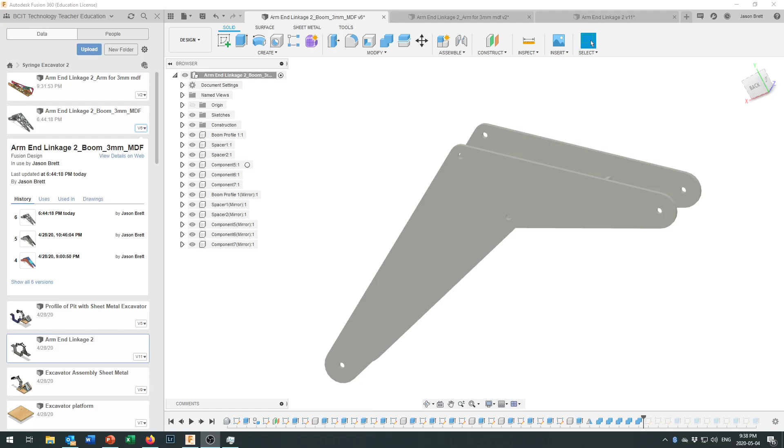So last day we finished off with modeling the boom here, and we inserted some braces and got it all assembled. We've got this part that we can add together later, and some nice pieces fit in here so that when we cut them out on the laser cutter, they'll all basically snap together, and then we can just glue them up with some quick setting glue.

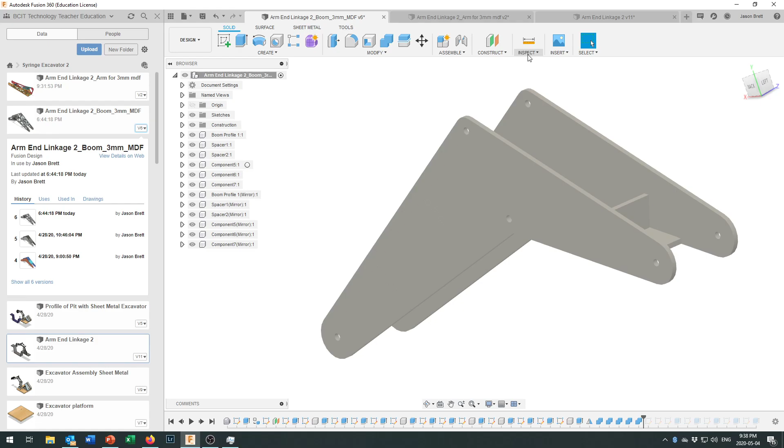And we took a look at how under inspect you can come into a component color cycling toggle, and we can put it all together like that.

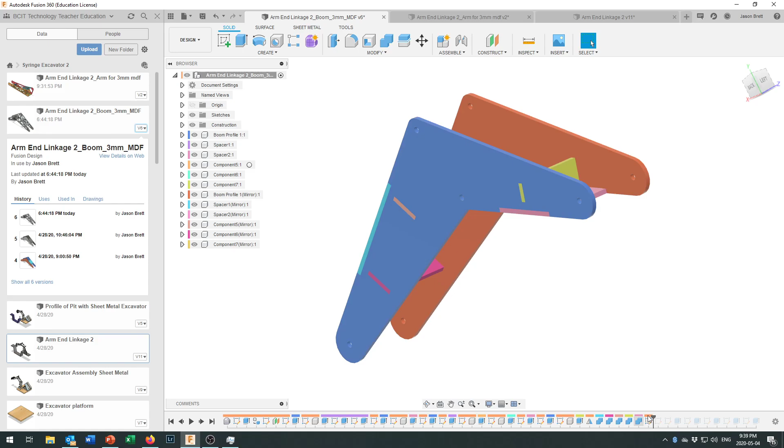Now, I know you're not required to truss this up, but I've seen what you guys can do with trusses and it looks really nice. So if you wanted to, you could come in here, and what I did was I started by adding some sketches, and you can see I've got more things in my timeline.

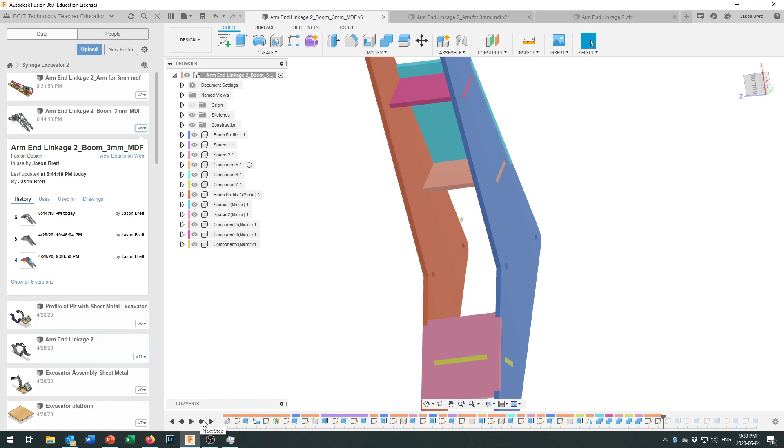So I've already gone and done this, and I've dialed the timeline back right here. I can go through and go step by step and take a look at where I put those sketches in. I'm just trying to find the first place where I started sketching right here. And there we go, I was sketching right up on the top right here.

So I came in and created a sketch here on the top. Looks like there's a couple sketches in there for some reason. What I did was I used a lot of projects to project information in here, and then offsets, and then I used some construction lines to come right across here. Then I turned off my construction line, so I was back to drawing object lines. And then I did an offset on the construction lines to get nicely spaced pieces right across there.

Now, as you'll know, we did a lot of our work parametrically at the beginning, and I'm not really worrying about constraints or anything like that right now. So this is horrifically non-parametric, and we're kind of stuck with what we've got by the time we get to these dimensions, which is why we did all the design work parametrically.

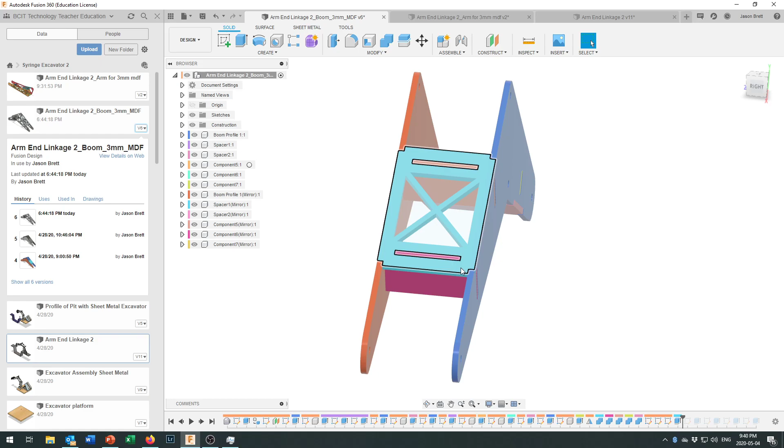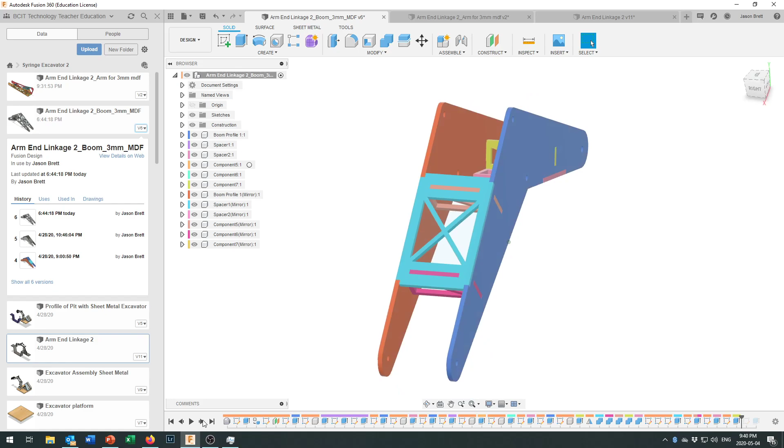So anyways, then I went on through here, and like I say, this is an optional extra if you'd like to do it. I took out those pieces right there, extruded that all the way through, took out some material down here at the bottom, took out some material on that green piece right in there, and then I came in and took away material on the sides right in here. So I ended up with a trussed out arm, or boom, sorry.

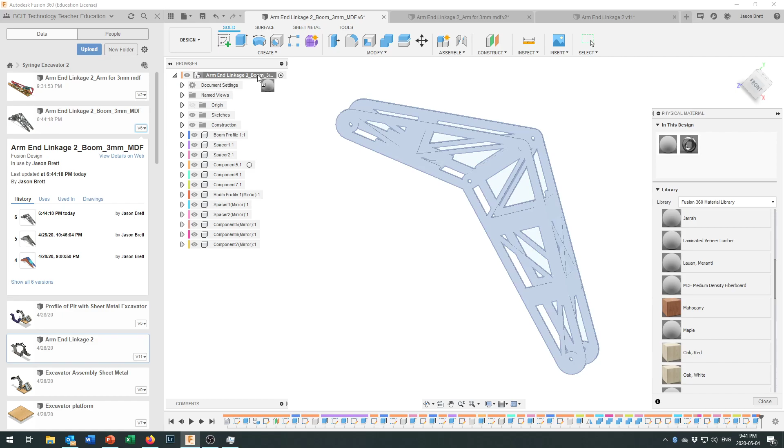And what I found was that untrussed boom, before I started removing the weight, it had a mass of 81.7 grams. And to find that out, you come in here and tell it you want physical material, and you go to the wood library, assign MDF to your project right there, and then you can come in here and write... Oh, just a minute, we're done assigning the material.

Let's close that. Once you've assigned a material to something, you can come in here and take a look at the properties. Properties is in here somewhere... Properties, right there, I knew it was. And over in your properties, you can see it gives you a mass of 45 grams.

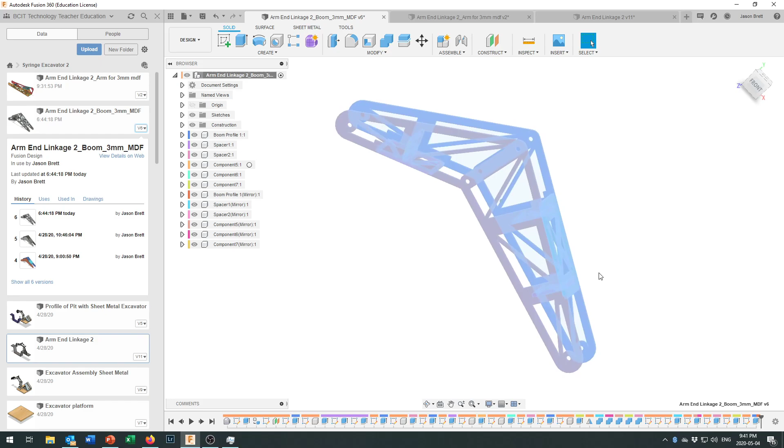So I took it down from a mass of basically 90 grams beforehand to a mass of 45 grams afterwards. I cut away 50% of the material and thus got rid of 50% of the weight, which means that we could have less load in our syringes. And just looking at it, I haven't run an analysis on it. Of course, Fusion 360 can run an analysis on the structure and tell me if it's going to be strong enough.

Just based on our experience building trusses with medium density fiberboard, I think we're going to be fine.

Now, the next thing that I asked you to do was to take that and go build the arm portion. So again, to make the arm portion, you start out like we did for making the boom portion. You come in right here, you identify this piece right here, and you can see that's in light green when you've got that turned on. So we've called that arm right there.

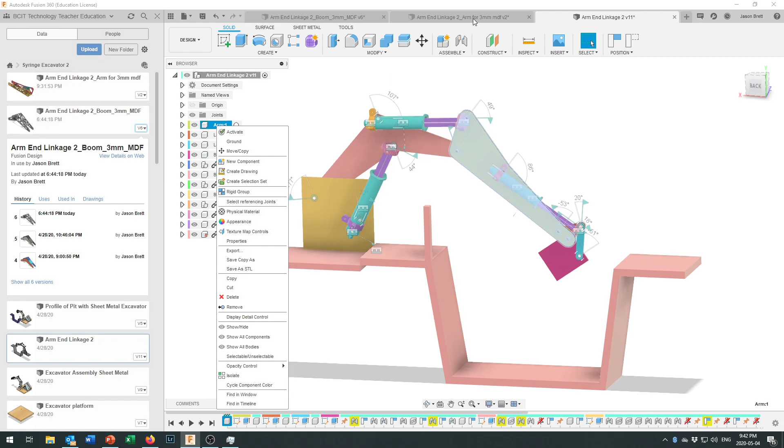You can come over to your arm in your browser. You can right click and save a copy of that as, and give it a new file name. And that's exactly what I did. It came out as Arm End Linkage 2 Arm, and I added the words for 3mm MDF.

Now, of course, it didn't look like this when I started. What it looked like, and again, this is the beauty of the timeline, I can drag the timeline all the way back to the very beginning of my project right here, and it didn't look like that either.

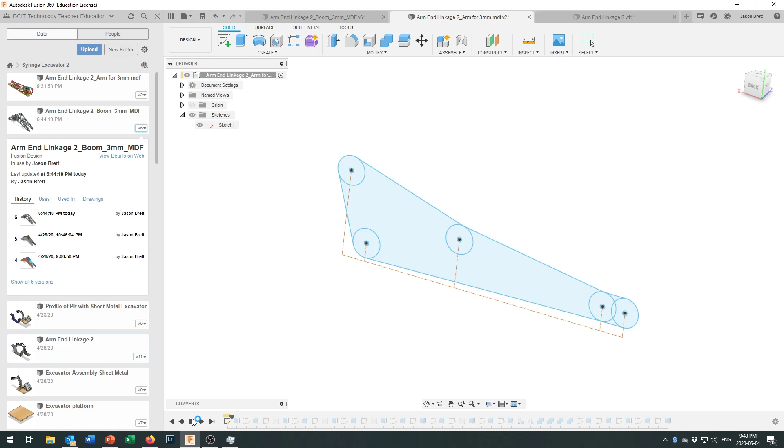Let's fit that onto the screen. It's probably just thinking that all out. Where did it go? Maybe I need to come one step in. There we go. That's what it looked like when we came in right here.

Oh, now it's playing it all for me. I didn't mean to hit play. There's some cool features that you've got in here. By hitting play, I'm going through and I'm doing it one step after the other.

Here we are right now. So these are the two steps that got imported from our original profile because we'd already drawn the profile and we did a 3mm extrude to it to make it out of MDF.

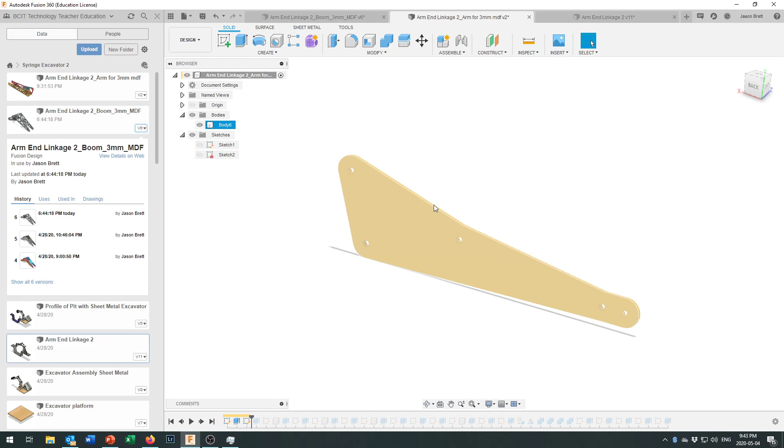And then I come in here and I drew a sketch right up here. And in just a moment, you'll see I then extruded that sketch out, cut it away, and used that sketch to create a new sketch plane right on that surface. And then gave it some dimensions, a couple of millimeters here.

I wasn't really concerned about the dimensions so long as I left enough room up here for this syringe to be able to pivot freely and this syringe down here to be able to pivot freely.

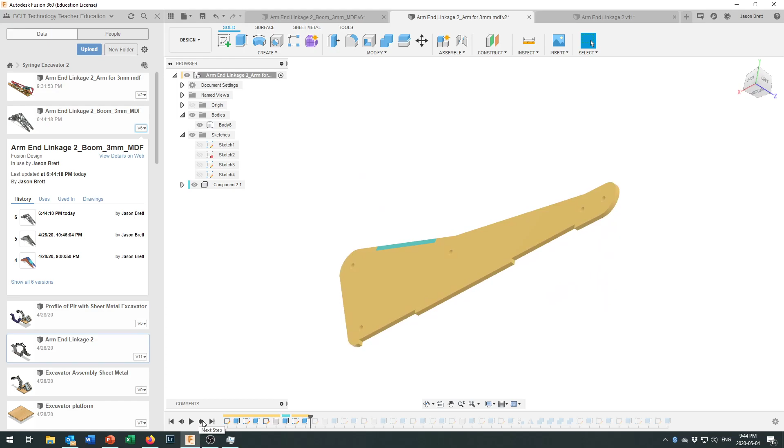Then I came through here, cut away a couple pieces down at the bottom, and then again used the new surface as a new sketch plane to create a piece that fit right in there.

I used a couple of tabs in here. If you just wanted to use one tab, you'd probably be fine with that. It just seemed like such a long surface that it was begging for more than one tab.

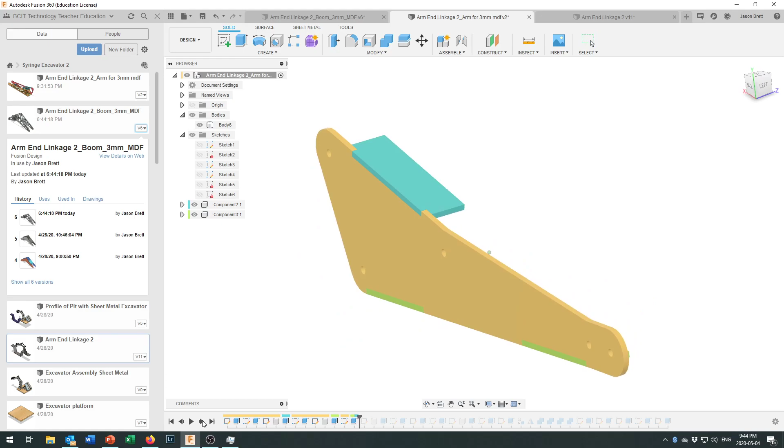And where did I go to next along here? Right in here. So then I came in here and first of all, I created a sketch right here. And then when I did my extrude, I extruded it up to the top side right here.

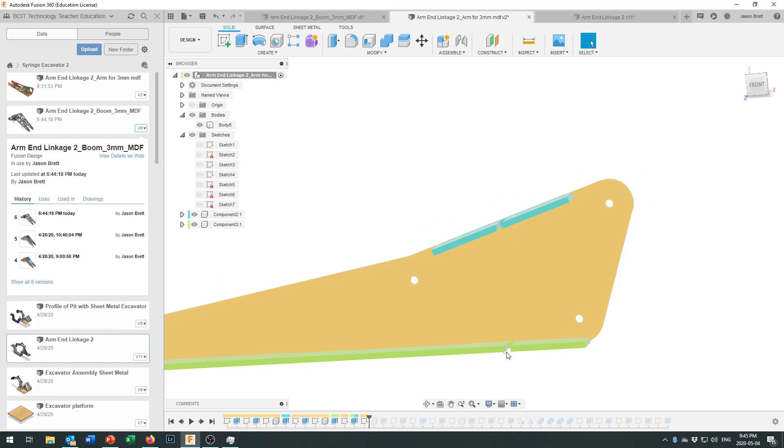And it was important that I went to the top side and all the way through because, of course, when you look at it this way, you can see that your little piece of MDF that comes up right here is going to have to come up all the way through right here because this edge is just a little bit higher up than that edge because this is at a slant relative to here. You'll see that as we go through and we put that in, we just make sure that our piece is tall enough to go all the way through.

So I went through and I drew this piece in right here. And again, I made sure that the top side came up to right here so that it would come out over here. And we've got a little bump on the surface.

If you'd come up to right here, you would have had a little notch on the surface, but you'd still have plenty of surface for a good glue joint. Here you've got 3 sides, 4 sides I guess, you can put a glue joint on. Probably doesn't make any difference in your structure whatsoever if you're not 100% set up the same way that I am.

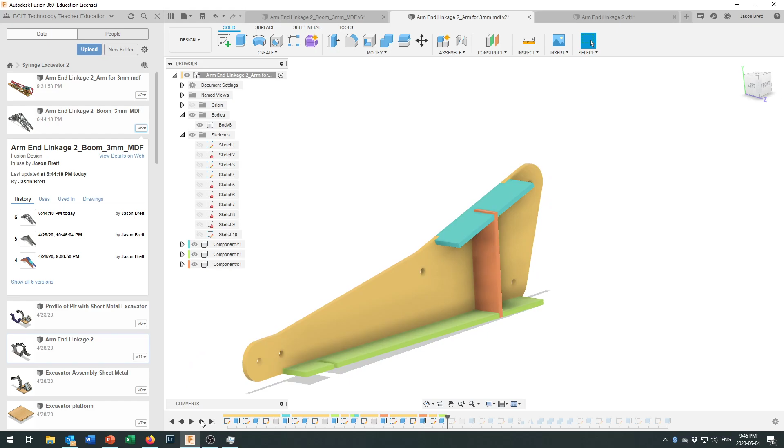Then I came in here and kept going along and added a slot down here and put a piece in right there. And then I came over to this side, knocked out a little hole, and did an extrude right through that hole so that piece would reach all the way through. While I'm doing those extrudes, I'm making sure they're all going into the right component. Having component color cycling turned on can really help you make sure they're coming into the right parts.

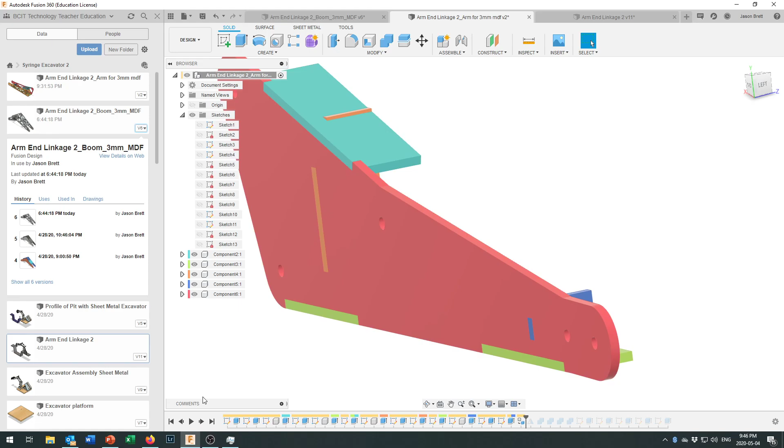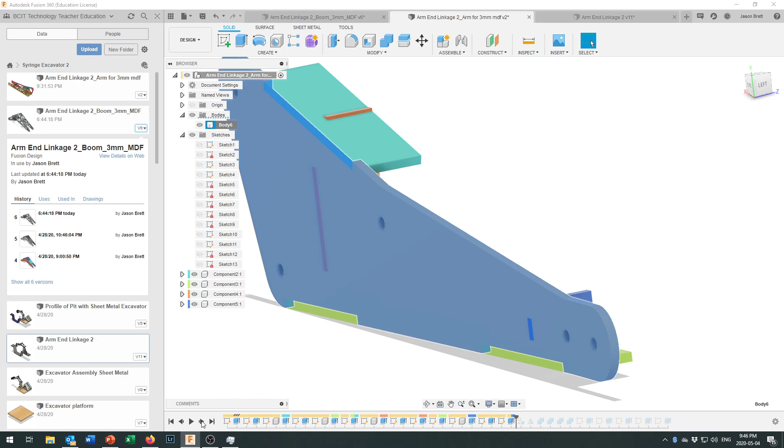Oh, I'd forgotten originally in here to come up - let me just go back one step. I hadn't turned this into a component, it was still existing as body 6. So I had to come up, right click on here, and create a component from body. That command right there - I should have done that right back at the very beginning when I brought it in. I forgot to, but thankfully I was able to sneak in and do it right now, and it didn't have any problems.

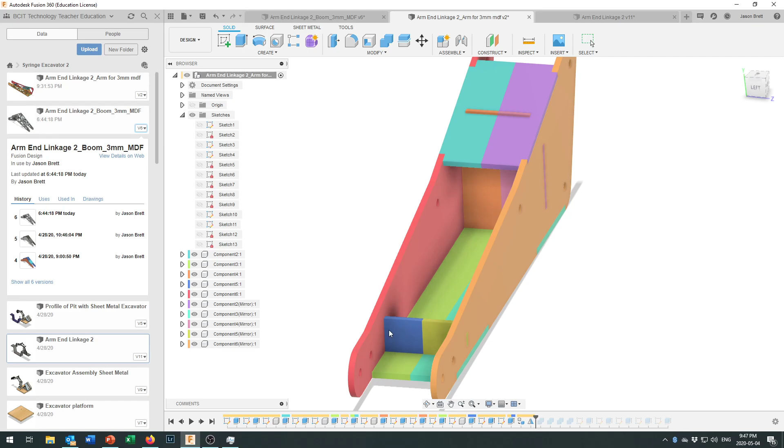So the next step was to mirror everything, and I used the mirror components command. So when you go to do your mirror - that was a create mirror - you've got to tell it in here that you want to mirror components, otherwise you might just get faces being mirrored. So that's a step to watch out for.

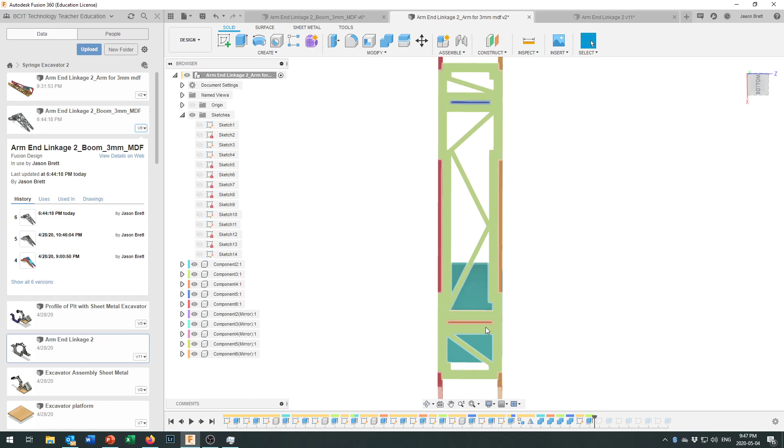Then I came through here and started joining those components together so they'd be individual components. Then I came in and started drawing some sketches on them, again using offset and project. So I'd project the geometry right here, then offset that projected geometry, and go through and use construction lines to create this geometry right here. Remember that you can't carve away those slots you just spent time making for your joints.

Trussing this up is entirely optional. Your arm should work just fine without it, but it does give it a kind of cool look to have it trussed all the way through. And so that's where I am right now - I've got an arm and a boom

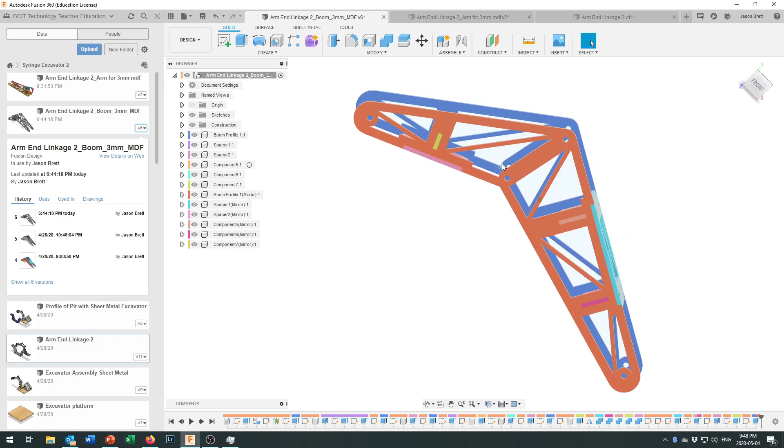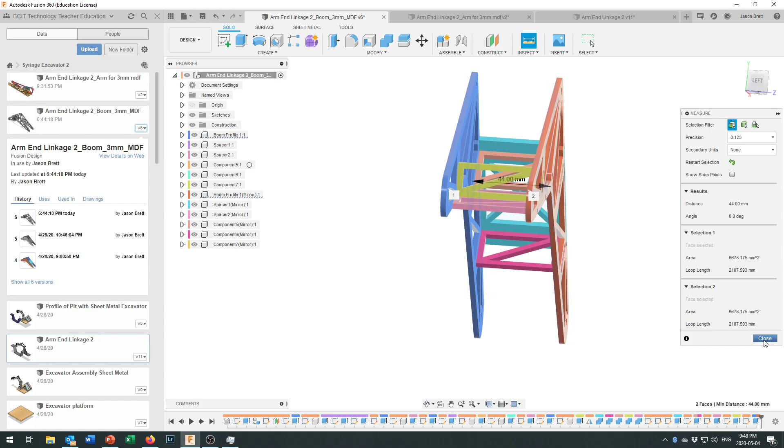ready to go together. Keep in mind as you're doing this, and let me stress how important this is, that you use your inspect, and on the inside of your boom, you measure that distance. The inside of the boom is 44 millimeters. That's really important when you come over to your arm end linkage that's going to fit inside there - you do an inspect, you do your measure, and that distance outside to outside should be 44 millimeters so that you can tuck that inside.

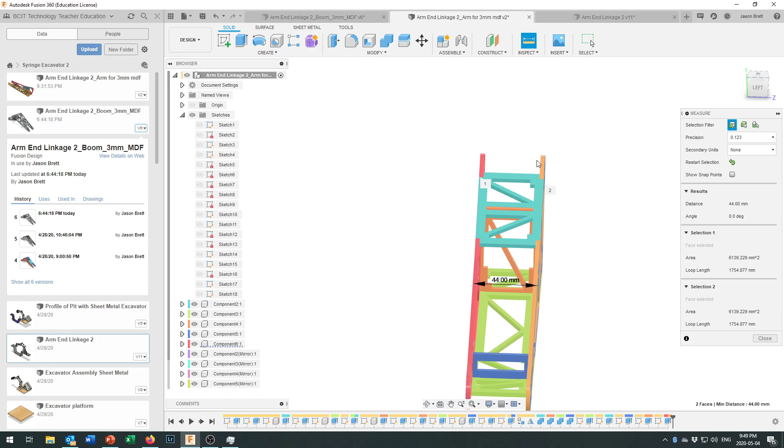If you mess it up, it's possible I guess that you could just offset it a little bit so one side of the boom was here and one side of the boom was on the inside right there, but it won't be nearly as pretty and symmetrical.

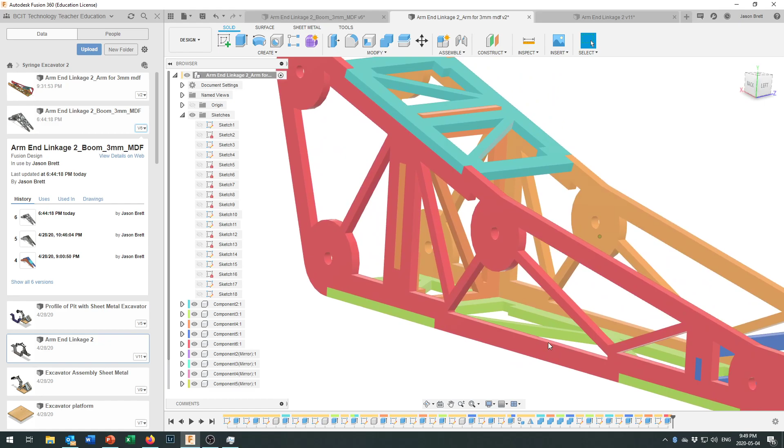Okay, so there we go. That's my quick, and I honestly mean quick this time, little answer key for how to create the arm piece, and if you want, a few tips on how to go about trussing it all out so it comes out looking pretty good. In the next step, we'll build the base, link these together, and pop a syringe into it.